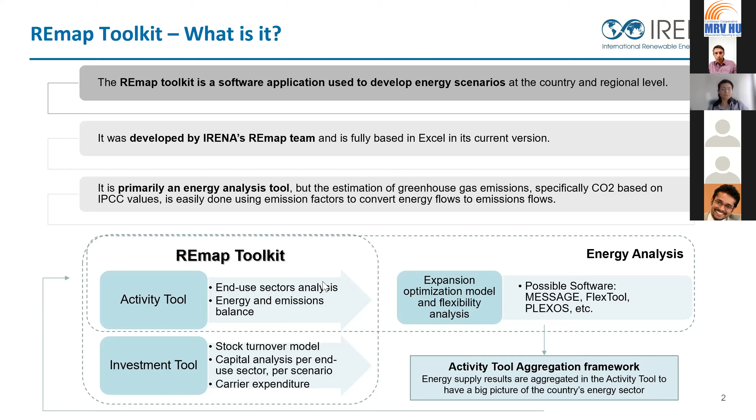We have a baseline scenario, which together with the planned energy scenario is the starting point of the analysis. The baseline scenario is one where you just extrapolate what is there in the country at the moment into the future, giving you an envelope of what might happen in the energy system. Then we have the planned energy scenario, which reflects existing policies, regulations and plans in the country that might or might not be implemented, but are at least agreed upon.

The other two scenarios are, so to speak, IRENA scenarios - the transforming energy scenario and the decarbonization scenario. The transforming energy scenario focuses on more ambition, but is still very grounded in the specific conditions of each country. Then we have the decarbonization scenario, which focuses on net zero - the focus there is clearly to eliminate net emissions of greenhouse gases.

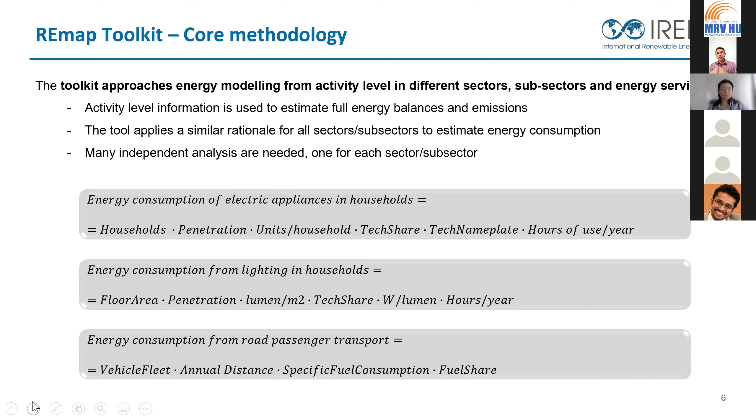Same thing for lighting, where we start with floor area, then understand penetration rates, demand for lighting service measured in lumens per square meter, and so on. These are just examples.

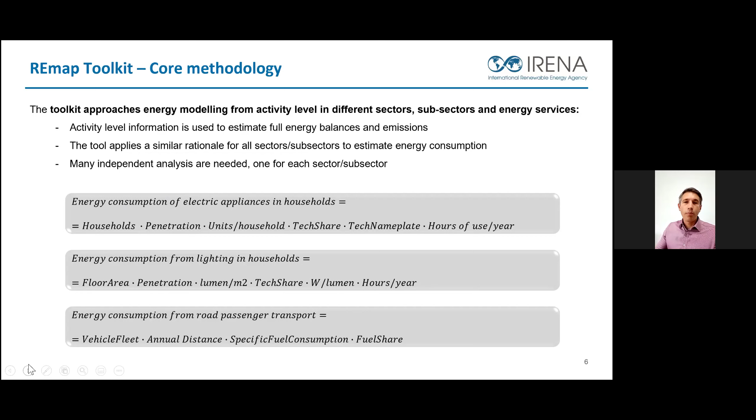Another example is the transport sector, for road passenger transport. We always try to start with the vehicle fleet—the number of cars of each type in the country—the average distance traveled by vehicles, the specific fuel consumption, and the types of fuels used. So there's a lot of input data needed, and as mentioned, that's the most time-consuming part of the analysis, but it gives you a very solid ground on which to develop indicators and propose targets.

So in terms of sectors and subsectors, on the demand side, we deal with 3 main sectors: buildings, transport, and industry. In buildings, we have residential and commercial buildings. For transport, we look at both passenger and freight transport, subdivided into road, rail, air, and maritime transport. For industry, we have 2 options. Industry is always a little trickier because sometimes there's a dearth of information, but we can look at it from a more macro level using industry GDP, or go down into subsectors like cement, iron and steel, aluminium, chemicals, and other industries relevant to the country being analyzed.

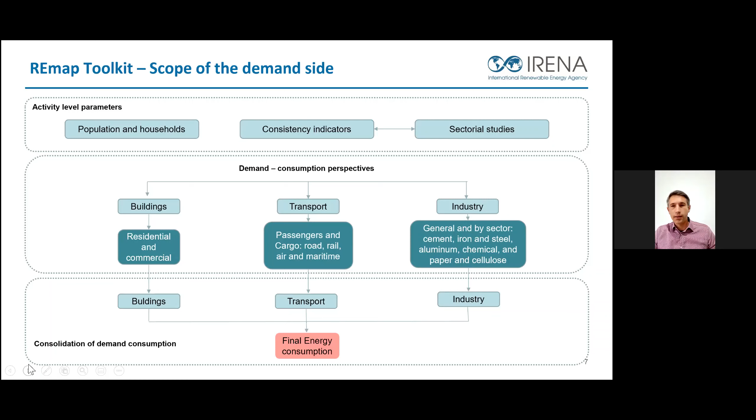A little more detail on the building sector. We subdivide buildings into residential and commercial, and then further subdivide each into 5 different energy services: space heating and cooling, water heating, lighting, appliances, and cooking. So there you see the level of granularity we're using in this tool. Each of these energy services is then further broken down into different technologies—for cooking, different types of stoves, or different types of light bulbs for lighting, and so on.

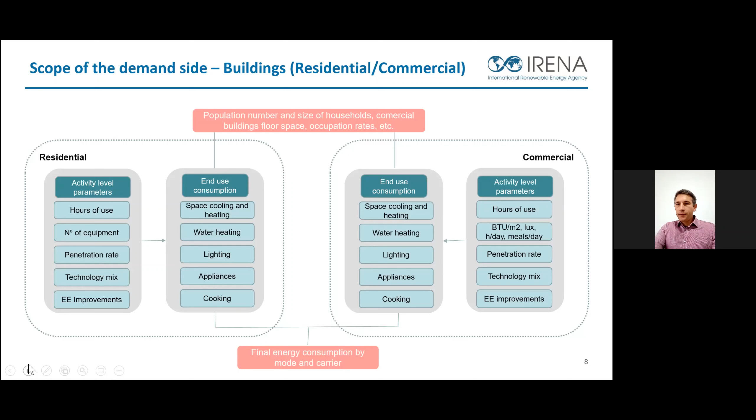For transport, we have both passenger and freight transport, subdivided into road, rail, air, and water or maritime transport, which could be rivers as well. Some of the input data needed includes vehicle fleet, distance traveled, occupancy rates—the number of passengers per vehicle for passenger transport, or tonnage per vehicle for freight transport—and the efficiency of vehicles, the energy consumption by kilometer. Applying those equations I showed before, we estimate energy demand by carrier, by fuel type, across all these sectors, subsectors, and energy services.

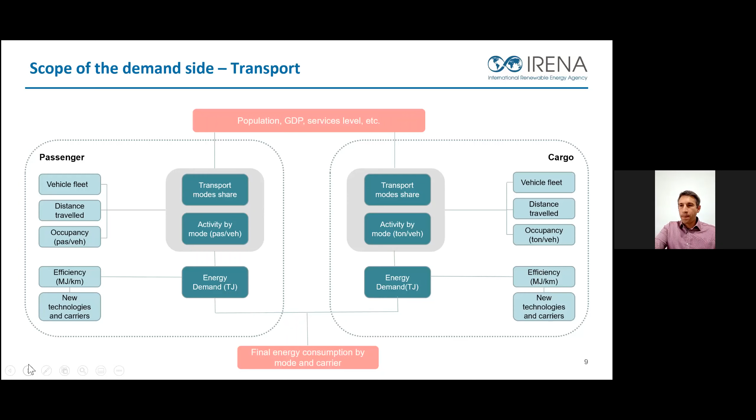For industry, we can start with a more aggregate view, looking at industry GDP, and to the extent information is available for subsectors, we can go deeper into those and make specific analysis there. If we're looking at subsectors, the rest of industry might be done using GDP, so we need some flexibility—it's always a little more challenging to work with industry. The information needed includes things like, for cement production, tons of cement produced every year, the production modes—dry kiln or wet kiln—so we can build the energy balance for that sector.

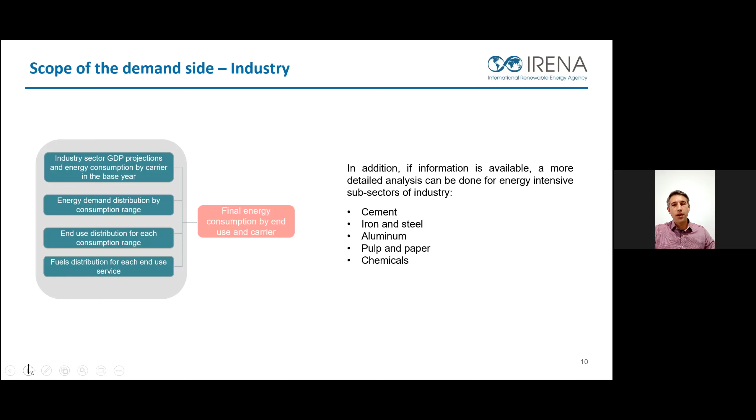So that was the demand side. Once we figure out the demand for energy, the next step is to understand how we're going to supply that demand. So we also have supply side analysis in the toolkit. The most important one tends to be the power sector—that's what people are most interested in. Here we rely on external tools; we do not do any power expansion or capacity expansion optimization using the REmap Toolkit itself. For instance, in Central America, we used the MESSAGE model, but other options can also be used, with some soft link between these two independently done analyses.

There's another transformation sector that's relevant in the tool, but very often we have to add new modules depending on the country being analyzed. At the moment, we have capabilities on bioenergy, hydrogen, and district heating, which are covered relatively well. But in some countries there might be specific interest in a type of biofuel we're not covering, so we'd work out how to address that need. The toolkit in the end is a work in progress—there's always something to incorporate, and we're happy to do that to serve the best interest of the country we're working with.

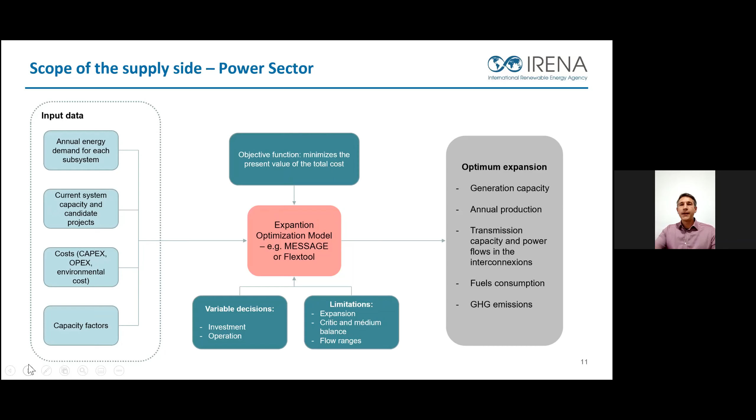Yeah, so it's still, yeah, you can maybe just go to the end of this one. Yeah, I think, good, yeah.

So this is about the power sector, and this is a very interesting development, called IRENA's FlexTool. This tool was not developed by the REmap team, so none of us here today is an expert on it. I have another group of colleagues in IITC Bonn that developed this tool with the help of VTT, a research institute, if I'm not mistaken, in Finland.

The focus of FlexTool, as the name suggests, is to assess the flexibility of power systems. So what we've been doing is, as we develop the power system analysis using, for instance, MESSAGE, we share our results with our colleagues who run FlexTool, so they can assess the flexibility of the power system we are proposing in our scenario.

This is something quite new. I think not many people are doing this, and as you're aware, it's a very key analysis when we're talking about the energy transition. So we're very happy to have the possibility of offering this analysis within the overall approach.

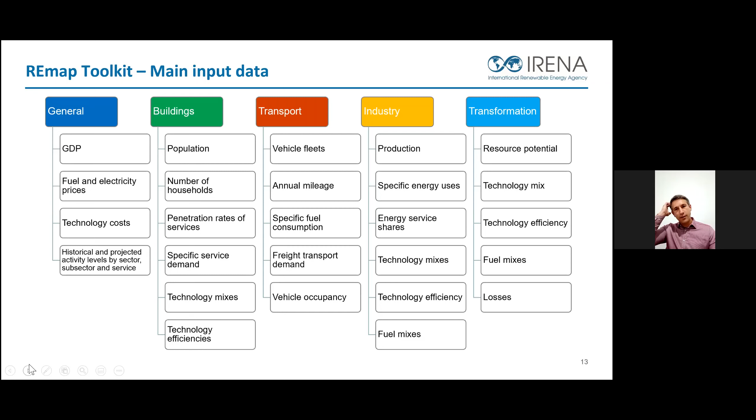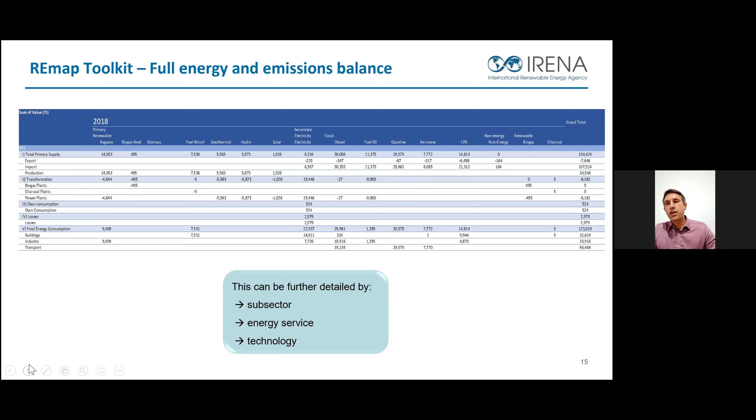The same applies to emissions. We can produce that type of table with all the detailed information of where emissions are happening in each part of the energy system.

Some strengths and limitations of the tool: at the moment we only deal with one country at a time. If you're a country and interested, that's not an issue, but it is more of an issue for us when doing regional analysis. We're trying to expand to do many countries at the same time.

We work with 4 scenarios, like I mentioned before. If we need more scenarios, we need to run the tool more times. We believe this tool brings a lot of transparency to the process, given the level of detail and granularity, and also because all assumptions and input data are open for anyone to see, if you're willing to disclose that.

We think it's very important that we produce full energy and emissions balances. Not all tools do that. All calculations and input data are openly available in Excel, so it's very easy to browse through the databases and judge for yourself whether something needs to be adjusted.

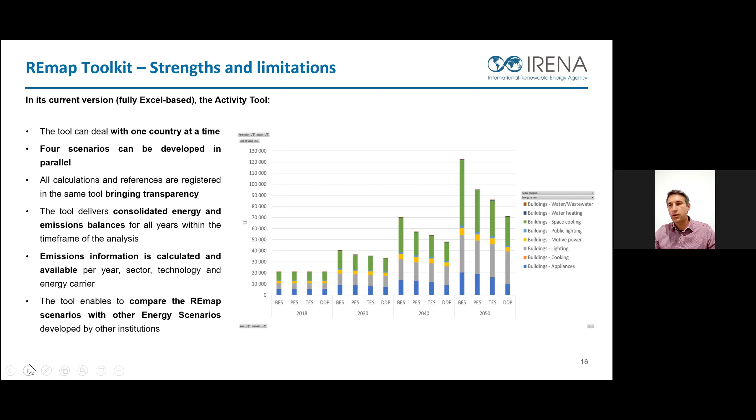It also allows easy comparison of scenarios. If other institutions are doing analysis, you can easily compare and pull the data to see how analyses from different institutions compare.

The transformation sector, just to confirm, is there. The level of granularity is a little less pronounced than on the demand side, and it's one where we always feel the need to add something new, given the needs of each country and the different analyses we're doing. But we can do that, and it's not a problem.

We also have in the tool the ability to do what we call the stock turnover model, to look at how fleets of different things evolve over time. So say you want to introduce electric vehicles in the country, and you want to understand what the sales of electric vehicles need to be to reach a certain share of electric vehicles in the fleet, given the existing fleet and its turnover. The tool allows us to do that type of analysis.

We are also developing, little by little, databases where we can have standard parameters and benchmarks that we can use to make comparisons. As we analyze a specific country, we can ask how it compares to a different country or to a best available technology or benchmark. So we are constantly collecting data as we do our analysis and building these databases to enable these comparisons.

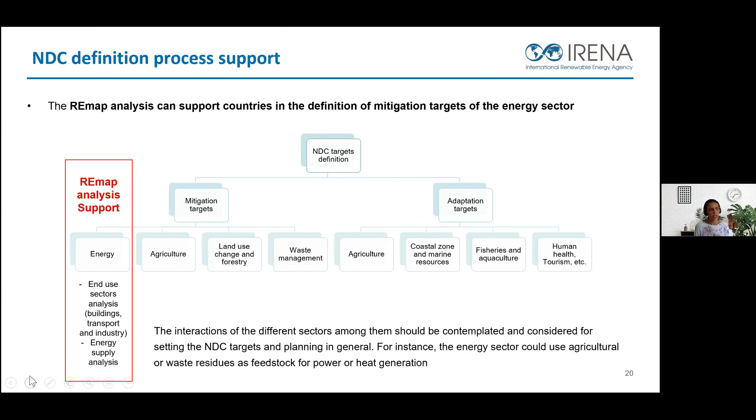Just to emphasize once again, the REmap analysis can support countries in the definition of the mitigation targets of the energy sector. The energy sector, including the end-use sectors on the one hand, that includes buildings, transport, and industry, and on the other hand, the energy supply analysis, which includes the power sector. Here, it is also important to emphasize that the interaction among the different sectors should be contemplated and considered for setting these targets. For example, how agricultural residues could be used by the power sector to generate electricity or to generate heat. If we go to the next slide.

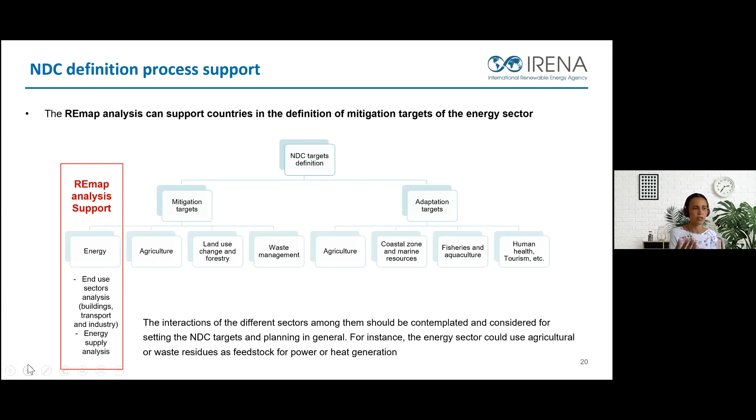But before that, we would like to mention what would be the process for this. As Rodrigo mentioned, first of all, we would engage with the country for the definition of the energy demand and supply scenarios, the reference ones and also the alternative ones. Then we would validate these results with the countries, which could come from the assumptions that we defined together in the previous step. Once we have the results, we would be ready to define or revise some targets based on the results obtained, and also very important, some indicators that could help us monitor the accomplishment of the targets defined. Lastly, we could also support countries on defining the actions that are needed in order to achieve these targets that have been defined.

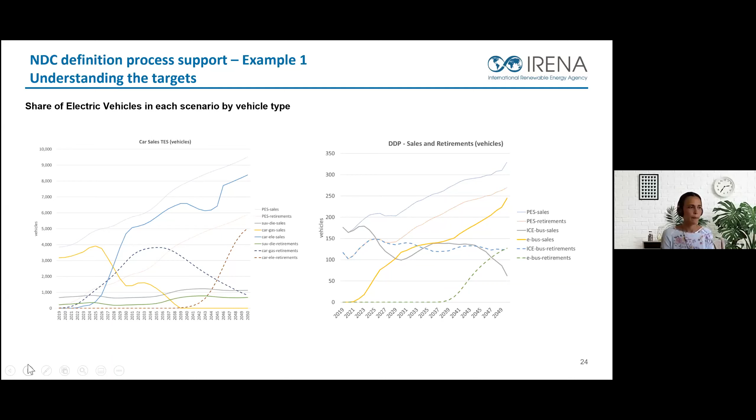Then we can propose specific objectives for each of the different measures proposed. This helps us really understand what the measures are, and also helps in monitoring them, to understand if we've achieved these targets or not.

Some recommendations we would provide: first, define the measurement unit. How are we going to account for this energy efficiency and conservation improvement? It could be in terms of energy intensity, or in terms of energy demand decrease between one scenario and another in the same year. There are different possibilities, but this should be specified in the NDC target.

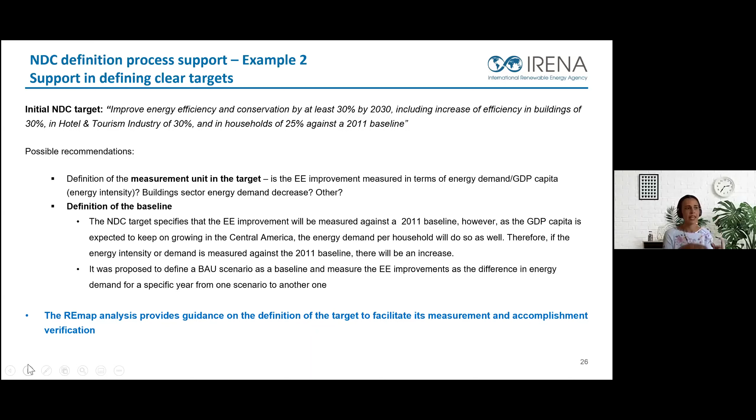It's also very important to define the baseline - it could be a past year baseline, or a business-as-usual scenario baseline, depending on the measurement unit we decide. The important thing is to have a clear idea of how we're going to measure the improvement, whether this target is achieved, and against which baseline we're measuring it.

In the next slide, we can see another example of how the REmap analysis can help us understand what this 30% energy efficiency improvement in buildings means, and we have a proposal of how this target could be expressed in a different way.

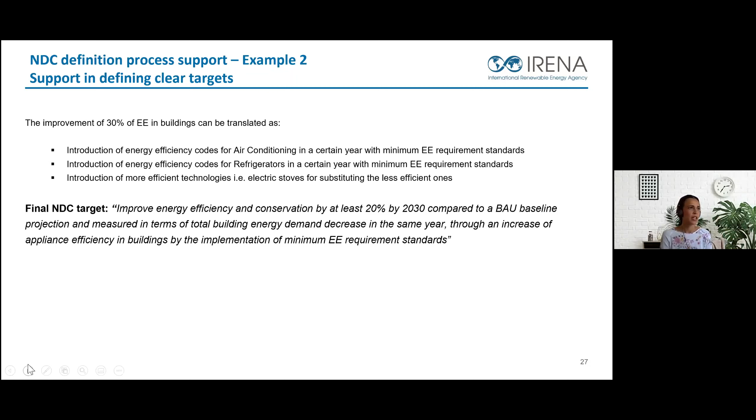To wrap up, we'd like to mention that the REmap analysis develops scenarios for the period from 2018 to 2050, with a bit more focus on 2030, but always keeping in mind the long-term goal for 2050. This ensures the objectives proposed for 2030 are already in line with those we want to achieve by 2050, leading the country in the direction it wishes to go. With that, I'll leave the floor to Christy to finish the presentation.